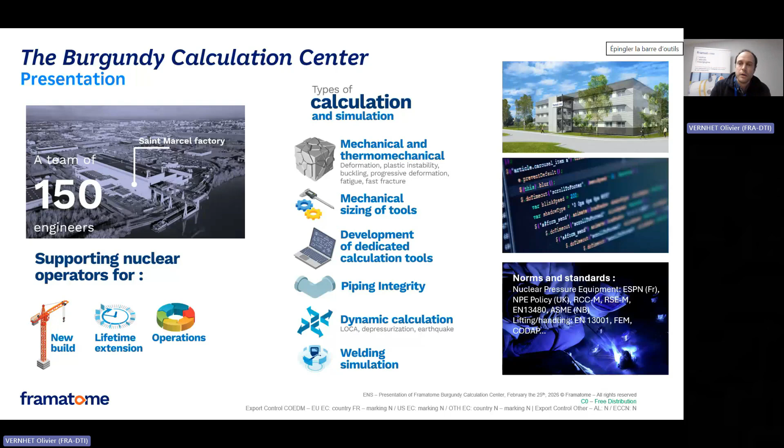So we are able to perform calculations according to different norms and standards in France and in Europe. The most common are RCCM or ASME, which you may all be aware of, and also different norms regarding lifting and handling equipment and nuclear pressure equipment.

So that we can then perform finite element calculations, we must also take into account mechanical characteristics, which we take from the codes, RCCM or ASME, or we can perform some tests, because we have facilities to perform tests just beside the Burgundy Calculation Center. And then we take into account the loads. Which type of loads do we take into account? Thermo-hydraulical loads.

We have some colleagues that provide us with those thermohydraulic loads. This can be CFD calculation or nodal calculations. And we also take into account seismic and thermal expansion loads coming from the loop calculation.

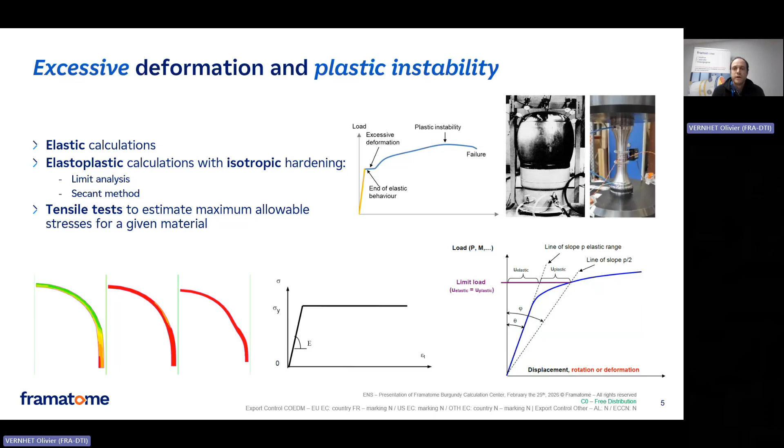Also, if we need, we have a technical center just beside the calculation center where we can perform some tensile tests. We've got at the upper right an example of a tensile test that we can perform here in the technical center. So if we want more accurate tensile properties, we may perform some tests on the material at stake.

Second failure mode that we study is progressive deformation. All these failure modes are codified in RCCM or ASME. These are common failure modes that we study.

So once again, we begin with elastic calculations, and if we don't manage to fulfill criteria, then we also perform some elastoplastic calculation. This time not with isotropic hardening, because we get cyclic loadings when we have a look at progressive deformation. So we use kinematic hardening.

And in SYSTUS, we have different models implemented for kinematic hardening, like Chaboche, Ohno-Wang, or Armstrong-Frederick. So we might use those different models to perform this type of calculation, to study progressive deformation quite accurately, and most of all to be able to discard any risk of ratcheting, which is the risk that we want to discard.

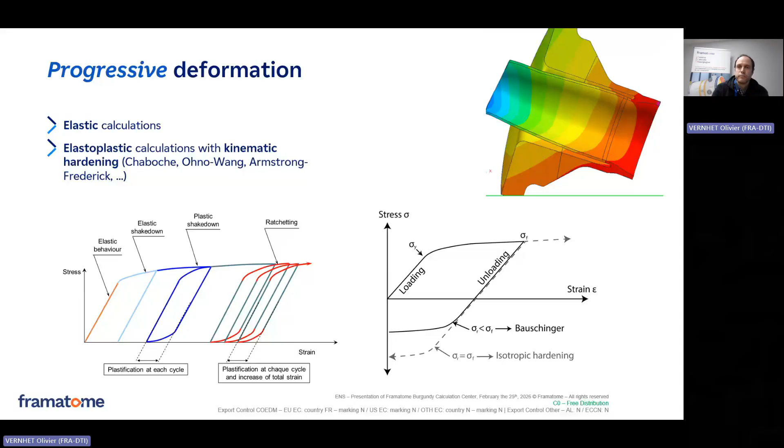So here you have the type of calculation that we have performed on the main feed line with progressive deformation using elastoplastic calculations.

Another failure mode we study a lot is fatigue, also with cyclic loading. Once again, it's codified in different codes, RCCM and ASME. We begin with elastic approaches. If it's not suitable, then we use elastoplastic approaches, also with kinematic hardening, the same kind of model I spoke about.

If optimizing the elastoplastic correction factor is not enough, then we might use a full elastoplastic approach where we calculate total strain amplitudes directly, to implement them directly in the Miner accumulation.

We study fatigue not only for crack-free material, but also on crack-like discontinuities, like partial penetration welds, for example. So we have tools to be able to study crack-like discontinuities.

Recently, different codes, ASME and RCCM, implemented an approach to take into account environmental effects. So our SYSTUS and our post-processors today implement the environmental effect methodology according to RCCM and ASME. We're able to implement both methodologies: extrema methodology and rainflow approaches. Rainflow approach is a more accurate methodology that is codified today.

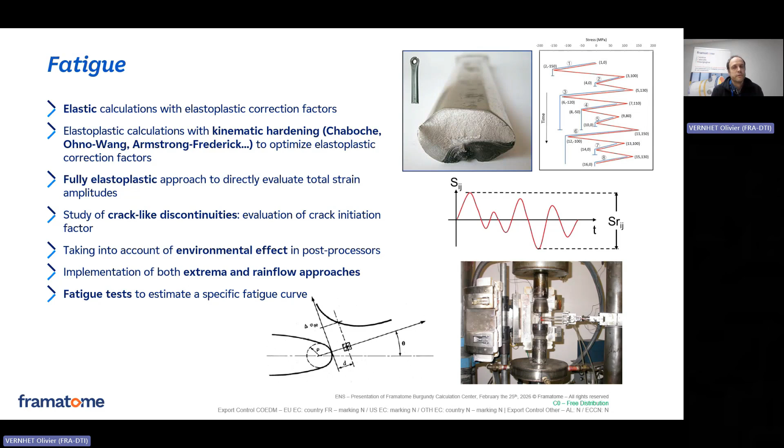The last failure mode I want to speak about is fast fracture. Of course, when we study fast fracture, we study both brittle fracture and ductile tearing. Once again, we begin with quite basic calculations, with flawless elastic stability and crack propagation calculations.

So we don't model the flaws, we use only an elastic mechanical behavior of our equipment. We model the flaw using influence functions that are codified and implemented in our post-processor. And if it's not enough, we might develop specific influence functions tailored to the geometry we want to study.

We might also develop specific elastoplastic correction factors because, as I said, we begin with elastic calculations, so we use elastoplastic correction factors. But sometimes the codified ones are too pessimistic, so we want to optimize them by performing correction factors specific to the geometry we study.

If that's not enough, then we might perform elastoplastic stability calculations, so we mesh the flaw. I'll provide you, just a few slides before, an example of a mesh with a flaw model.

This is a typical calculation we perform: we model the flaw, we put some elastoplastic material properties, and try to check that the defect is stable. We might also perform elastoplastic crack propagation analysis with the flaw remeshed along the propagation. And once again, we might perform tests, toughness and crack propagation tests, also at the technical center just beside.

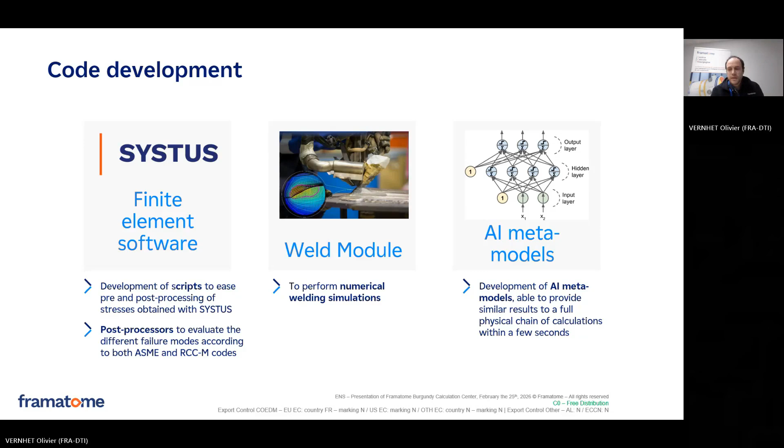We showed that we could develop a meta model able to calculate stress intensity factor without going through SYSTUS, without going through the post-processors, only using AI meta models. I'm going to present you the results we had.

We went through the whole physical chain of calculation using SYSTUS and the fast fracture post-processor, which helped us evaluate stress intensity factors. We ran this calculation for around 3,000 samples, giving us training data for 3,000 samples. We then trained a convolutional and recurrent neural network with this data and tested our meta model on the test data, getting quite good results, with a mean error of 0.86 megapascal per square root meter.

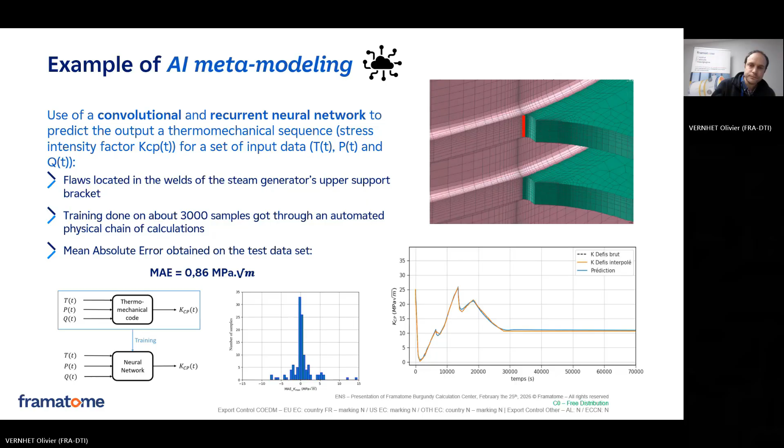Now just a few examples of achievements, stress reports that we performed recently. We are at Framatome, so of course we performed the stress report of the components provided by Framatome, most of all EPR components, like for Flamanville 3, for Hinkley Point EPR in the UK.

We also perform stress reports for the components of replacement. In France, we are currently replacing steam generators for the 1300 megawatt power plants, so we perform the stress report for these steam generators of replacement. We also provided steam generator replacements for South Africa, for Koeberg, for Eskom, and we perform the stress report for these components too.

And now we're beginning to perform stress reports for EPR2, the new EPRs that are beginning to be built in France—six EPR and maybe 8 more. So we're beginning the stress report for this big program. Also, we're performing stress reports for submarines, because we have a defense section, so we're also able to perform defense justifications with the same kind of tools, same kind of approaches.

Let's go a little bit more in detail into another project called in French VD4 1300. So 1300 is the power of the power plant. VD4, VD stands for decennial visit, 4 stands for the fourth decennial visit. What is a decennial visit?

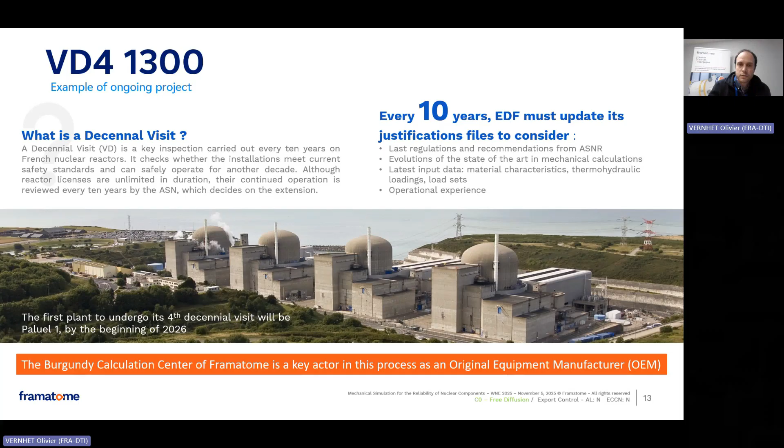For example, in VD4 1300, we also updated our justification for the 1300 megawatt power plants. This was a big project last year because we had the safety authority milestone for the end of 2025. We had to complete all the justifications for the different equipment by end of 2025 for EDF, so that EDF could provide the file to the safety authority, with all the different criteria I spoke about fulfilled. So this was quite a huge work for us.

And so we managed to finish all the different calculations by the end of last year and to fulfill all different criteria. But of course, this required a lot of effort. There were around 40 people working on this kind of project.

We used different methodologies: basic linear elastic calculations, but also isotropic and kinematic hardening elastoplastic calculations, sometimes flaw modeling, full 3D explicit modeling, and so on.

We also had to upgrade some processors to be fully compliant with the requirements of the safety authority in France. This was a huge work in terms of planning, because sometimes we had to implement more complicated criteria which were not supposed to be performed at the beginning. So we have a planificator dedicated to the planning of the whole Burgundy Calculation Center.

And of course, we had a lot of interfaces with the project, with the customer, with the safety authority, and also with our colleagues providing us input data.

Another example: on main coolant lines, we had to perform more than 60 elastoplastic calculations in 6 months. So you can see the typical elastoplastic calculations we perform with the flaw mesh here, to provide justification of main coolant lines.

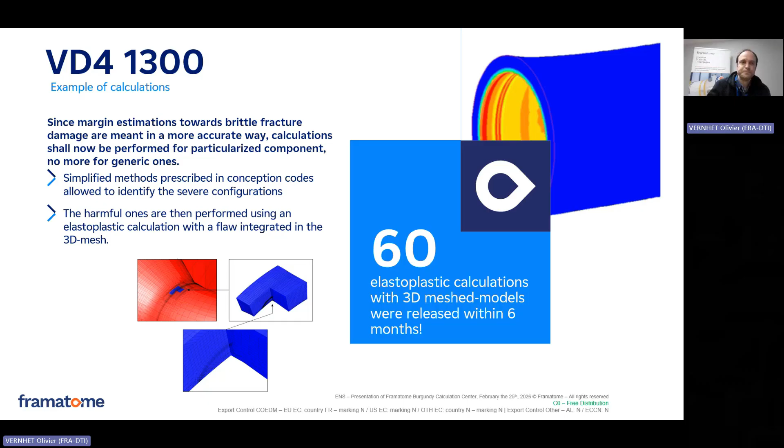I'm done detailing the typical calculations we performed recently. I'm going to speak a little bit more about the factory, because the Burgundy Calculation Center is located in Burgundy, in Saint-Marcel, close to Chalon-sur-Saône, and we are located inside the factory.

So here you get some photos of the factory, dating from 1974, when it was built for the first time, providing equipment for the first French power plants, the 900 megawatt power plants.

Then we had an extension of this workshop in 2005, to be able to deliver equipment for the EPR program, for Olkiluoto in Finland, for China, and for France.

This facility delivered recently some equipment for Hinkley Point C in the UK. And in 2024, a little more than a year ago, we started manufacturing the reactor pressure vessel and steam generator for Sizewell C, another power plant in the UK, and for EPR2, the next 6 power plants to be built in France.

And now the facility in Saint-Marcel is beginning to evolve a lot for EPR2 and also for maybe some other coming projects abroad.

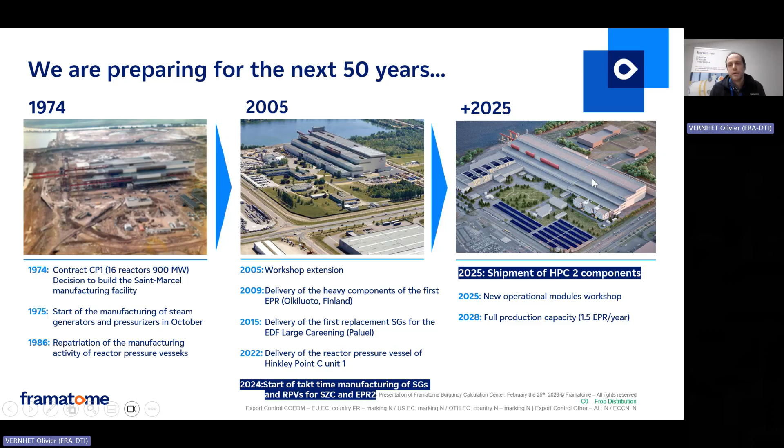The objective of this extension is to manufacture 1.5 EPR per year by 2028. Today it's more like 0.7, 0.8, and the objective is to double our capacity to manufacture 1.5 EPR every year.

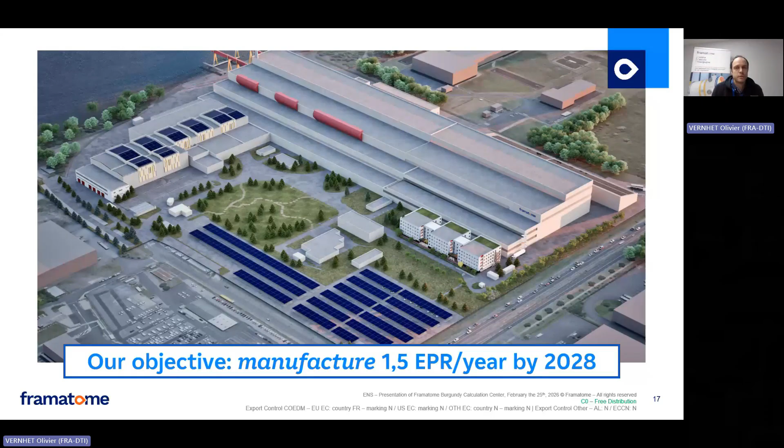And with this extension, of course, we will have new tools: new handling tools, new welding tools. As I said at the beginning, inside Burgundy Calculation Center we also have the capacity to perform some sizing of tools, so we are also involved in this big extension project at the Saint-Marcel facility.

And we perform some tool sizing for this facility, for handling and manufacturing, but also for transport. Here you can see some cradles and stowage for some components. Here, I think, is a pressurizer.

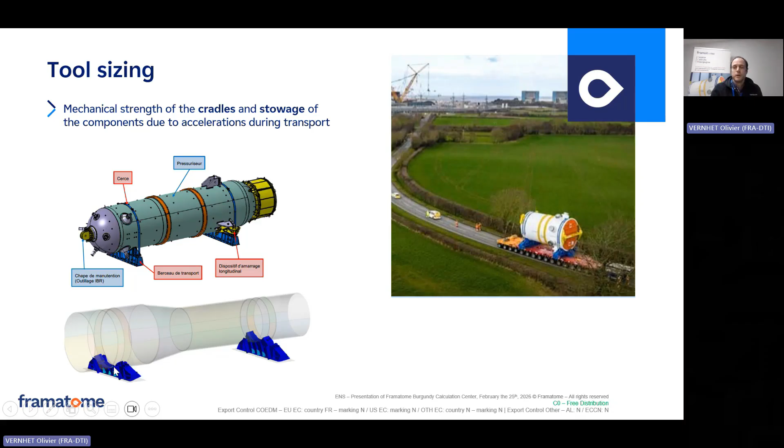So we also perform the calculation of the behavior of the cradles of the pressurizer. Here you can see the finite element calculation of the cradles. And of course, for handling, we perform justification of handling tools, for example here for the steam generator channel head.

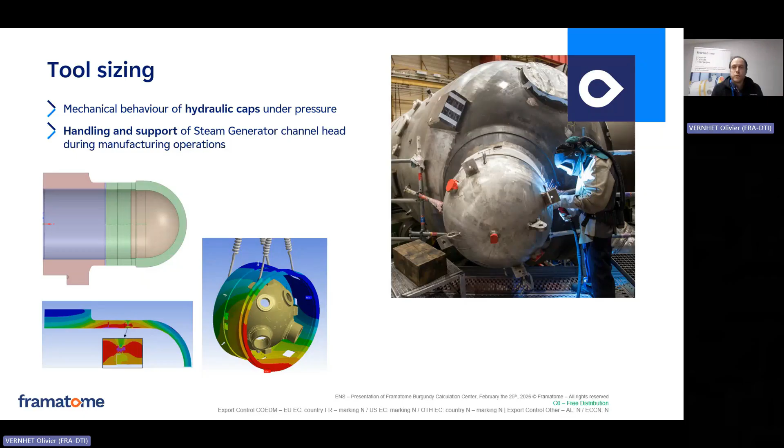And also for hydraulic testing, when we deliver equipment at the end of manufacturing, we weld some caps to close the equipment before increasing the pressure above the operating pressure, to check whether the equipment can withstand it and to detect any leaks or flaws. So we have to justify these hydraulic caps, and this is also performed in the Burgundy Calculation Center.

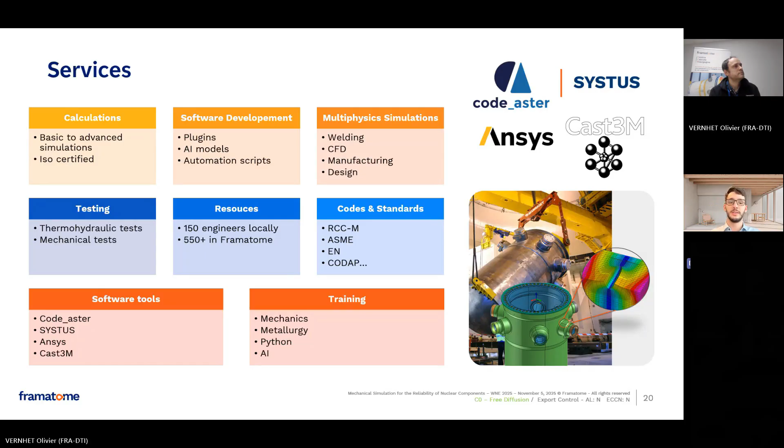So maybe first question. You mentioned several types of damage. Which would you say is the most complex to predict, and why?

I would say the most complex to predict is fast fracture, because you have two different types: brittle fracture and ductile tearing. It depends on the type of material, and you may have different behavior of the material. It also depends on the type of flaw and on the loading.

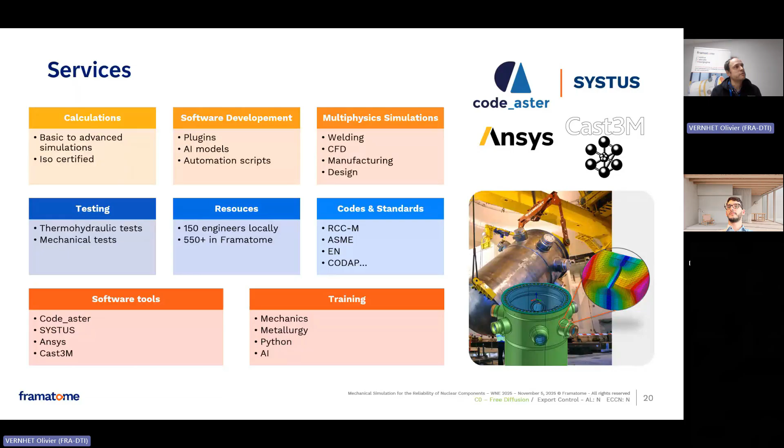We have some methodologies implemented in the code that are good, but sometimes too onerous, too penalizing. So there's been a lot of research and development in Framatome to develop more accurate methodologies, like the advanced methods I spoke about a few slides before. It's been quite a lot of activity for us to develop those approaches, because we needed them to be more accurate, since this is the failure mode that is most difficult to assess very accurately.

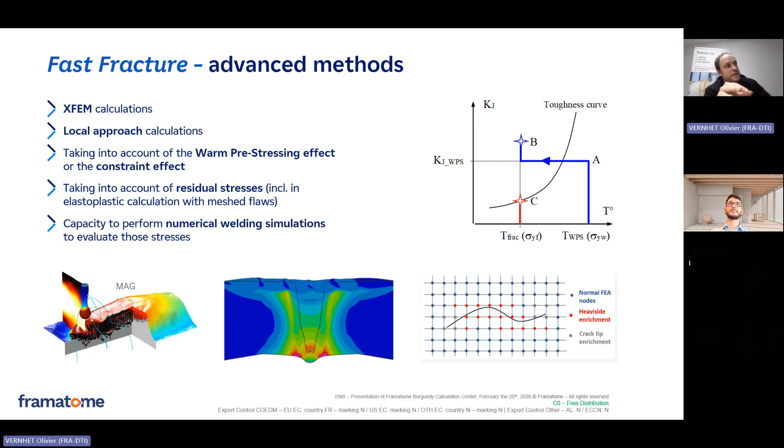Do you also do thermohydraulic simulations? Yes, in terms of thermohydraulic simulation, not in Burgundy Calculation Center since we specialize in mechanical calculations, but my colleagues in Lyon and Paris perform either CFD calculations, as we spoke about, or also nodal calculations. We provide a nodal equivalent mesh of the primary circuit or steam generator, for example, and perform monophasic and diphasic thermohydraulic calculations at the different nodes of our model to compute speed, pressure, and temperature, which are typically the input data we use. When I spoke about thermohydraulic loads earlier, that's typically CFD calculation results, but most of the time we also get results from nodal calculations.

What would you say are the benefits of using SYSTUS over ANSYS? ANSYS is a good software when using Workbench, for example, it's quite easy to use with a graphical interface. SYSTUS' interface is maybe less user-friendly than ANSYS, but its advantage is that it's a code oriented for nuclear applications, with a whole ecosystem of post-processors to compute fatigue, fast fracture, and we've implemented all the operational experience from our 60 years of calculations at Framatome with different laws. I mentioned Chaboche, Ohno-Wang, Armstrong-Frederick, laws with kinematic hardening used to perform progressive deformation and fatigue calculations, and those laws are implemented in SYSTUS. We've also implemented extended finite element method so we can perform XFEM studies for fast fracture calculation without having to model the defects.

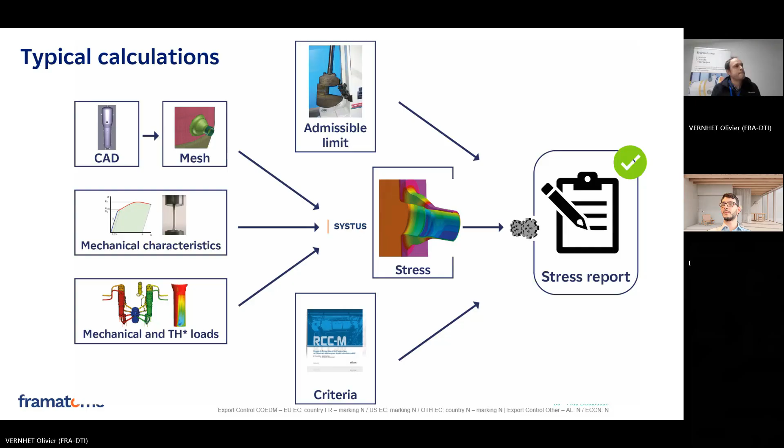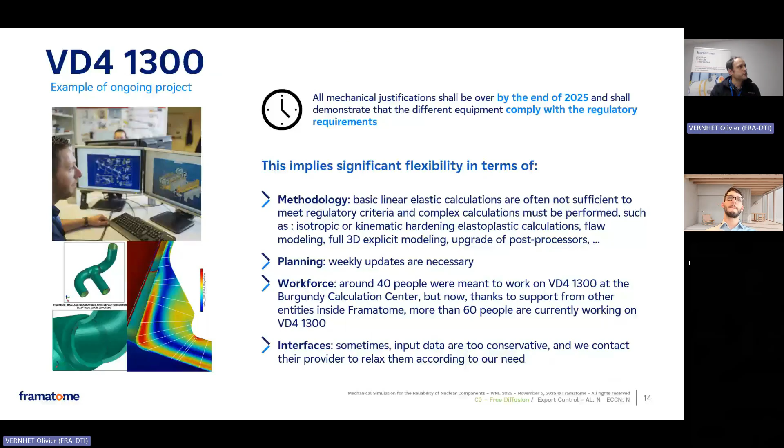Someone asks for contact info, maybe an email. Olivier, could you share it if you're free? Yeah, of course, it's not very complicated. Yes, just there, here it is. So you can write to Olivier directly, and I will redirect to the people necessary.

Perfect, so a longer question - I'll come to this later. Do you perform calculations for loss of coolant accidents, blowdown events? For loss of coolant accidents, yes, we perform dynamic calculations and thermal-hydraulic calculations. But I'm not sure I understand the link with blowdown events.

Maybe the person who asked can specify blowdown. I'm also not familiar with it - fast fracture in dynamic conditions. This is not something we usually do, the interaction between dynamic loading and fast fracture. But I know some of my colleagues who are experts in the domain study this subject. We don't perform this type of calculation for stress reports, for example, but it is something we study. I couldn't tell you the typical approach since I'm not an expert in this domain, but I know we are doing some R&D on the subject.